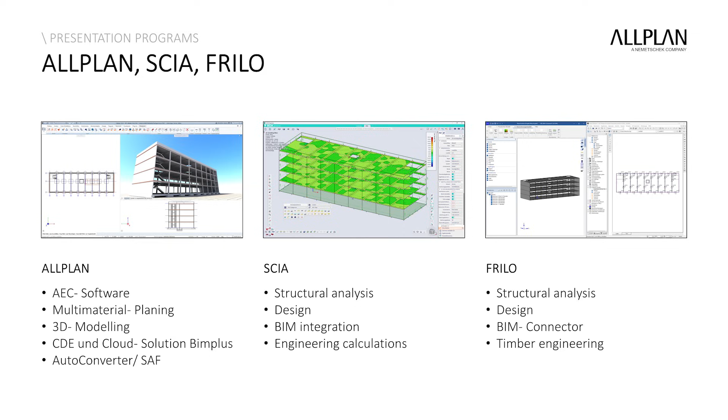ALLPLAN is an AEC software that allows users to plan across multiple materials and covers all areas of construction. Furthermore, ALLPLAN provides a currently unique CDE, Common Data Environment solution with BIMPLUS and the autoconverter. SCIA and FRILO are both structural analysis software programs for the calculation of simple and complex statics. The integration of these 3 programs thus represents entirely new possibilities.

Next, I will present the cloud-based Open BIM workflow between ALLPLAN, SCIA and FRILO. The workflow begins in ALLPLAN with the creation of a 3D building model. This model is then transferred to the CDE BIMPLUS via an IFC file. Additionally, the autoconverter is linked to the CDE BIMPLUS, providing structural engineering with a previously unique opportunity to participate in a BIM project.

Subsequently, a consistent analysis model is imported into the structural analysis programs SCIA and FRILO via SAF, where the calculation of the building is performed. Finally, the results are transferred back to ALLPLAN via an SAF file, where the corresponding 3D reinforcement is generated based on these results.

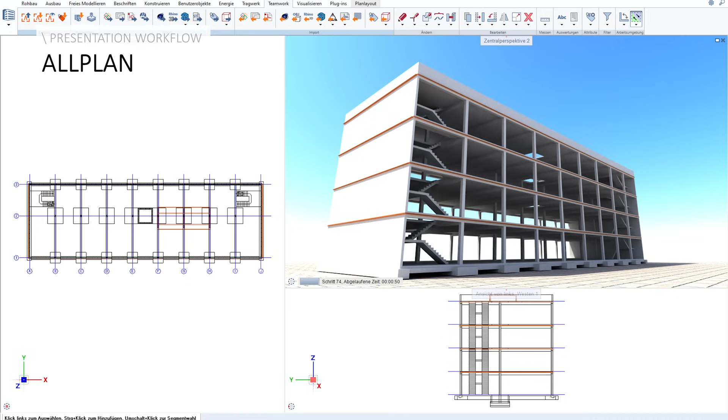At the outset, a building model is created in ALLPLAN. I've opted for this type of hall because such constructions with columns, slabs and beams often present significant challenges when transforming from architecture to calculation programs. After modeling, the upload to BIMPLUS is done via IFC.

Next, let's take a brief look at the model in BIMPLUS. As mentioned earlier, BIMPLUS is a comprehensive CDE that allows access to model data via the web at any time. In addition to this basic function, BIMPLUS offers numerous more features.

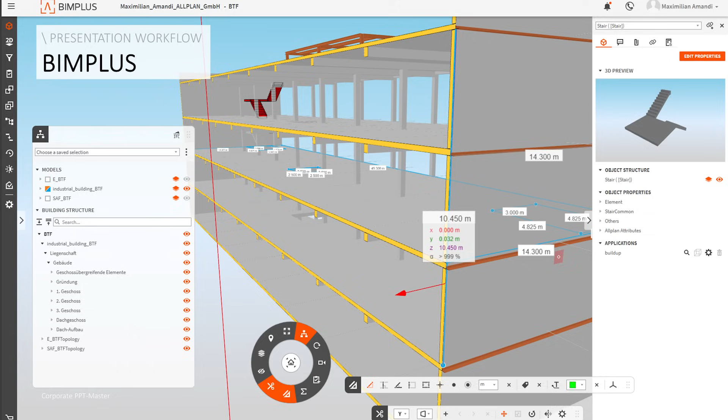For example, sections or measurements can be directly performed on the model. Creating revisions and collision checks are also possible. Furthermore, there is the option to attach specific information such as documents, comments or files to individual components to provide model-related information to all project participants.

The next step involves generating a seamless analysis model through the autoconverter directly within the web application. This is also the point where, in a project, the structural engineer begins their work. Due to the autoconverter being directly linked to BIM+, there is no need for a re-upload of the model.

The creation of the analysis model occurs in 6 steps. After selecting the model, or models from which an analysis model will be generated, the first step involves cleaning up the model.

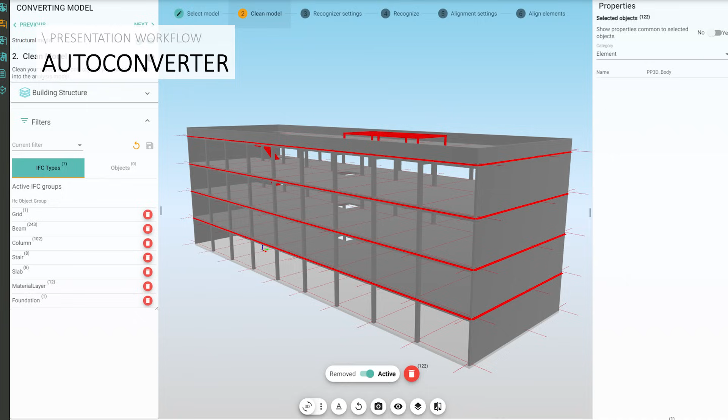It's important to note that no elements are deleted, they are only hidden. In the following step, you can set the recognizer settings. This includes defining how individual elements, such as columns, should be recognized. Additionally, it's possible to define materials and cross-sections for components.

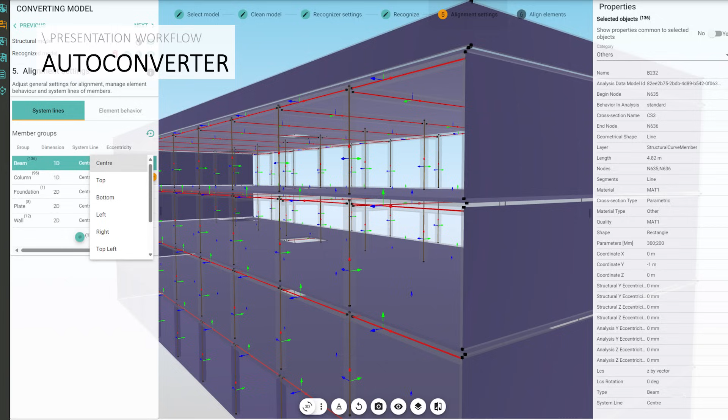After the elements have been derived according to the previously made settings, the alignment settings are now applied. This involves specifying the system lines as well as the eccentricities. Finally, the model is merged and aligned. It can be observed that the components have now been merged accordingly in this way.

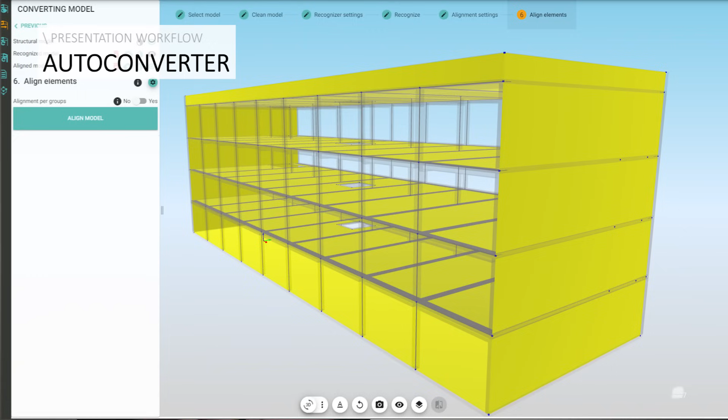A seamless analysis model has been generated, which is now available to the structural engineering for further processing. It's also important to note that the unique component ID is retained for the respective elements. This model can now be exported in an SAF format with the required coordinate system.

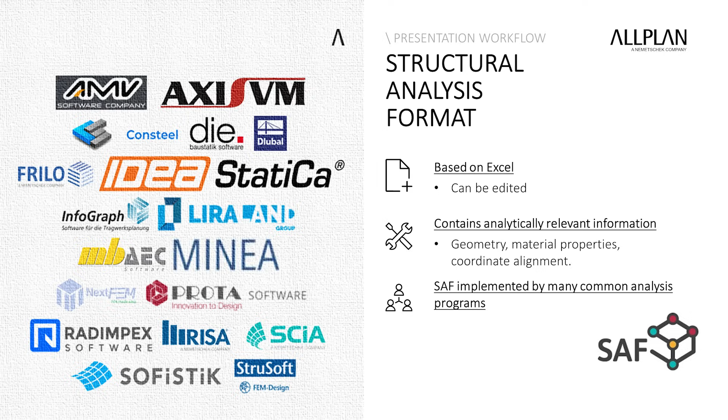Before proceeding to the calculation, I would like to briefly introduce the SAF format. SAF, which stands for Structural Analysis Format, is based on an XML or Excel file. This makes the file very easy to edit. It also contains all the information needed for structural analysis and nothing beyond that. Additionally, SAF is already supported by various structural analysis programs, making it an open file format as well.

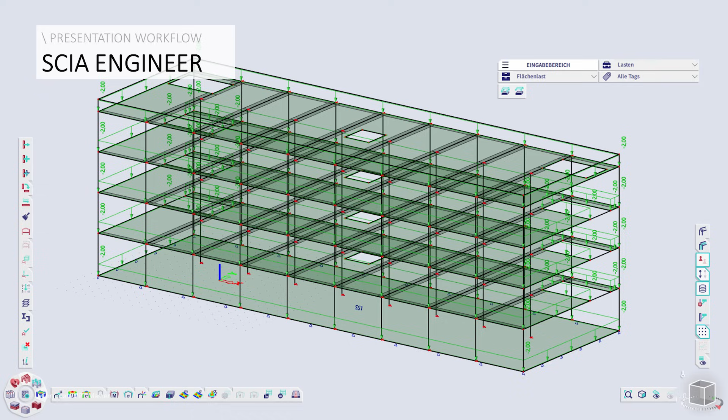In the next step, the finite element method, FEM, calculation of the building is performed. This can be generated by both SCIA and FRILO. In SCIA, simply open the previously generated SCIA file. Then you can proceed directly to generating loads and defining supports. Then the building is calculated. The results of individual components, such as the slab, can now be exported in ASF format.

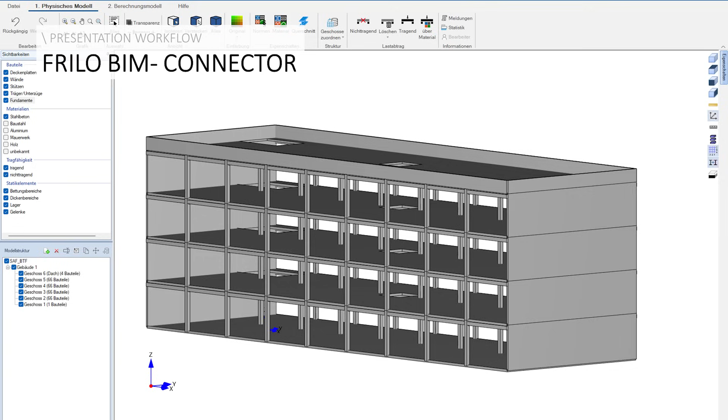The calculation process in FRILO follows a similar approach to the SCIA with a minimal difference. FRILO provides the BIM connector for importing building models, offering similar capabilities to the autoconverter. This allows the structural engineer to review and, if necessary, adjust their models before the calculation process.

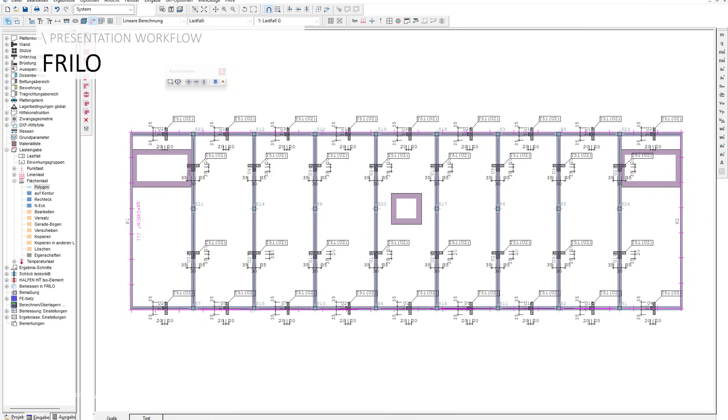After the calculation model has been generated and prepared for further analysis, you can now choose whether to calculate the entire building or only part of it. In this example, the slab of the ground level is once again transferred to the PLT module. In the PLT module of FRILO, loads are applied and calculations are performed. The results from the PLT are then also exported in an ASF file in case further adjustments are needed or if the construction partly does not yet comply with the static requirements.

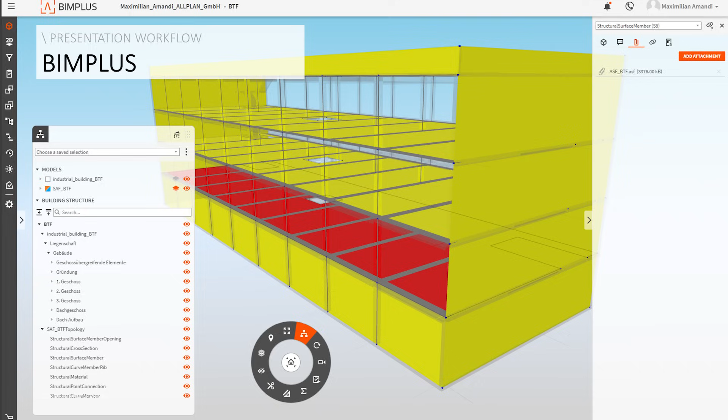BIMPLUS also offers options for revision and collaboration. There's the option on BIMPLUS to directly attach the generated ASF file to the component, making it available to other project participants. Additionally, there's the option to create issues and assign them directly to the respective specialist planner. The generated issue is then also displayed in ALLPLAN, allowing for immediate revision if necessary.

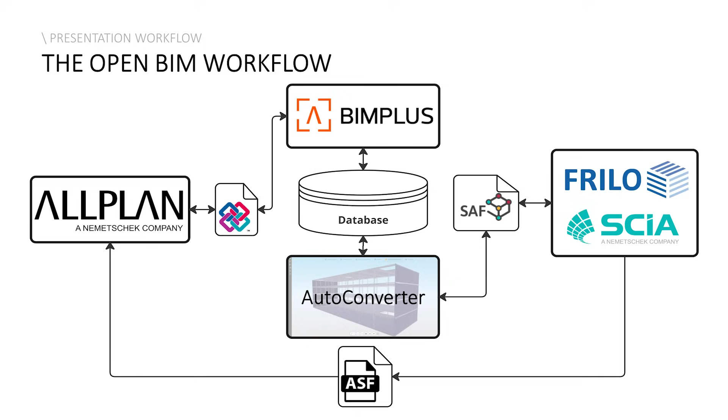If all results are satisfactory, reinforcement planning can commence in ALLPLAN. For this purpose, the model is first prepared in ALLPLAN and the necessary views and sections are generated. In this case, a view from below and a longitudinal section are generated from which the respective heights are derived. Afterwards, the ASF file containing the corresponding results is imported to commence with the reinforcement planning.

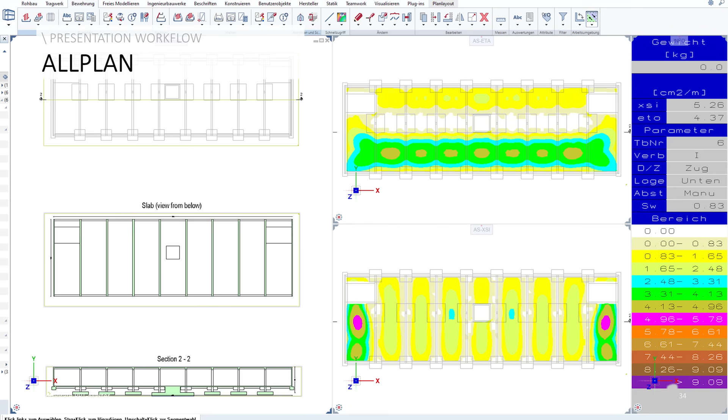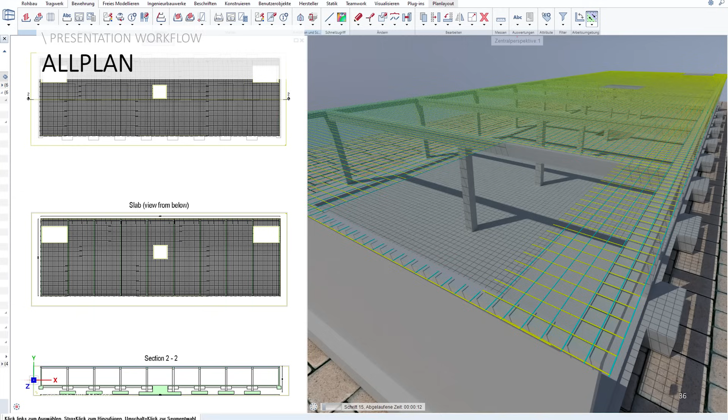In this process, the FEM results are divided into X and Y directions. When reinforcement is inserted, the respective cross-section values are directly calculated with the FEM results. This way, you can immediately see where additional layers of reinforcement would be necessary. Once the appropriate 3D reinforcement has been inserted, all possible drawings can now be derived directly from the model in conclusion. So concludes the workflow.

Finally, I will summarize the results and individual steps of the workflow once again. The workflow outlined above begins in ALLPLAN with the architectural design. Subsequently, the structural engineer defines their analytic model using the autoconverter and BIMPLUS. This model is then calculated in FRILO or SCIA.

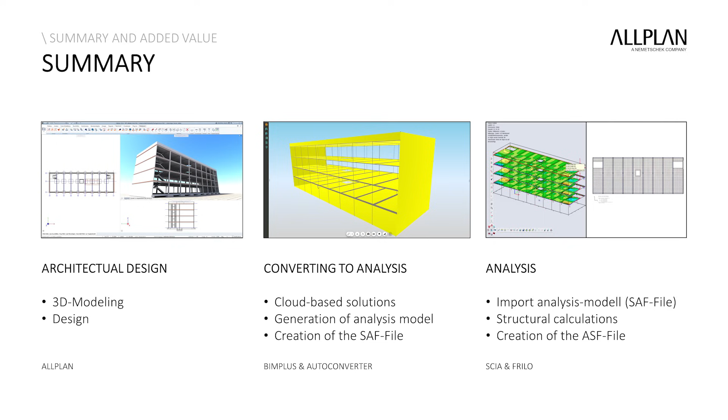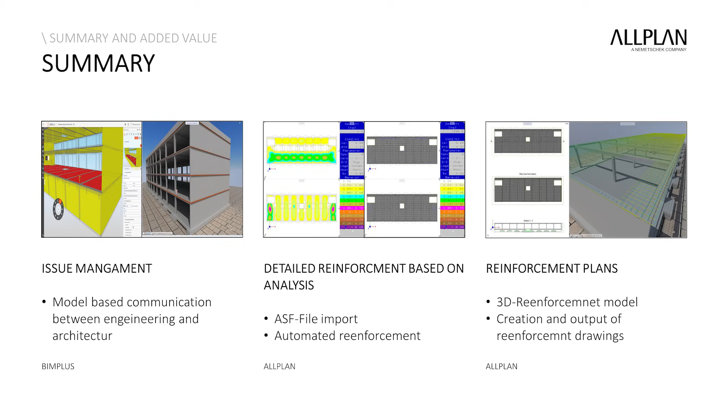After the calculation, there is the possibility on Bimplus to locate constructive errors directly in the model using issue management. Once all issues have been resolved, 3D reinforcement planning based on the FEM results can commence in ALLPLAN. Finally, various plans can be derived from this model.

In summary, from this workflow, the following advantages emerge: comprehensive solutions from architecture to analysis and detailing, collaborative coordination of details based on one model, design and engineering of reinforcement based on an integrated analysis, and it's an open BIM workflow. This concludes my presentation, pending your questions, and thanks for your attention.